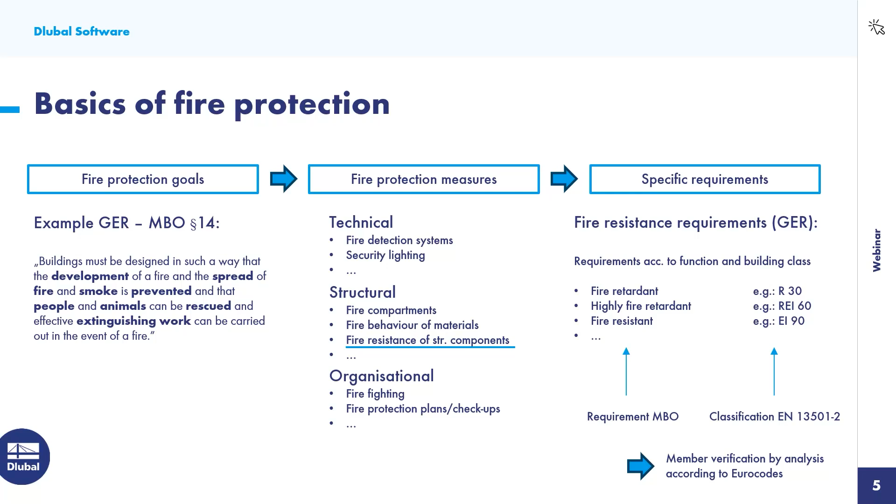So let's take a look at how fire design is regulated in the Eurocodes. I would like to start with the combinatorics. According to Eurocode 0 or EN 1990, the case of fire is to be regarded as an exceptional design situation. Accordingly, the mechanical actions are combined without partial safety factor.

The use of psi 2,1 is recommended in the main document for the leading variable action, but there are many deviations in national annexes. In Germany, for example, psi 1,1 is prescribed for leading wind actions. It is obvious that the combination rule results in significantly lower actions when compared with the permanent and transient design situation that we commonly use for the design under normal temperature.

As a safe side assumption, the loads from the cold design multiplied by a reduction coefficient can also be used. However, this is generally uneconomical and therefore not recommended, especially when we use a design software that can do the correct combinations anyway, like RFEM.

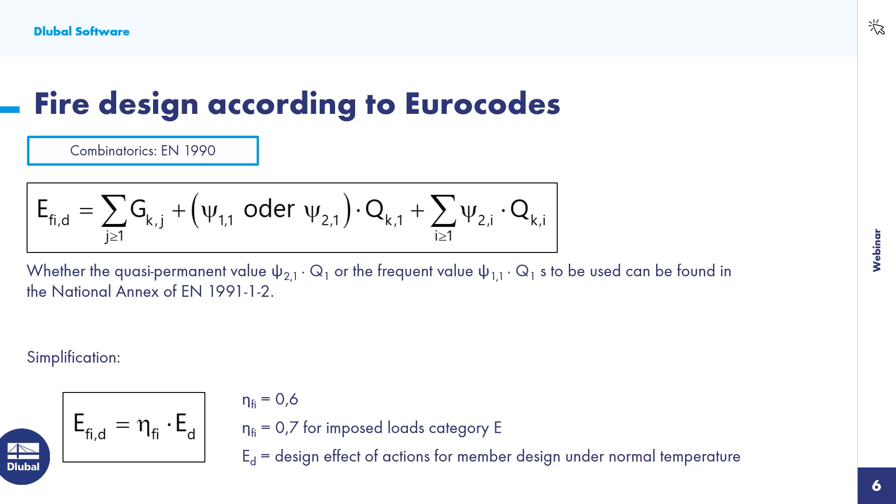In addition to the mechanical actions, the thermal action in accordance with EN 1991 Part 1-2 must also be taken into account. In the event of a fire, there's a considerable increase in the ambient temperature, and sooner or later, the structural elements exposed to the fire will heat up as well. This has a dramatic effect on the material properties of steel components on one hand. On the other hand, the temperature increase can lead to indirect stresses in case thermal expansion is restrained.

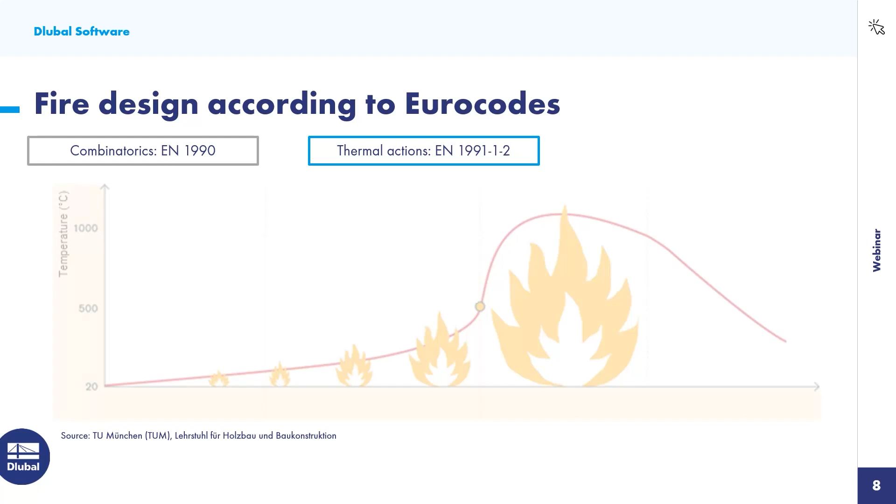Real fire scenarios develop in 4 stages. We have the incipient stage, the growth stage, the fully developed fire phase, and the decay phase. The transition to the full fire phase is called flashover and is associated with a rapid rise in temperature. For engineers, it is very challenging to accurately predict the development of a natural fire scenario. Instead of trying, so-called nominal fire curves have been established almost 100 years ago to describe the temperature developed in a compartment over the duration of the fire in a simplified manner.

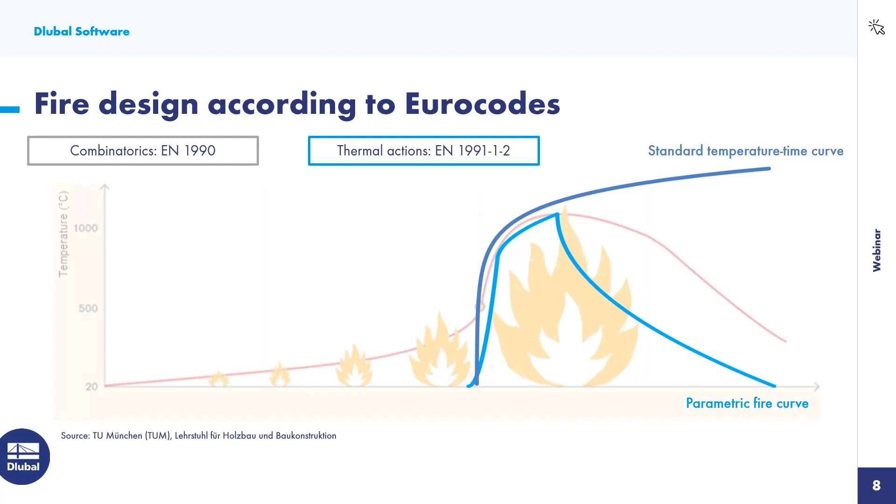The standard temperature curve is used for fires inside buildings. This temperature curve is also used for standardized fire tests on structural elements, which means that the behavior of typical elements under this nominal fire exposure is quite well documented and verified. Alternatively, the Eurocode also allows the use of more sophisticated approaches to predict the temperature development, such as parametric fire curves, zone models, or results from CFD analysis.

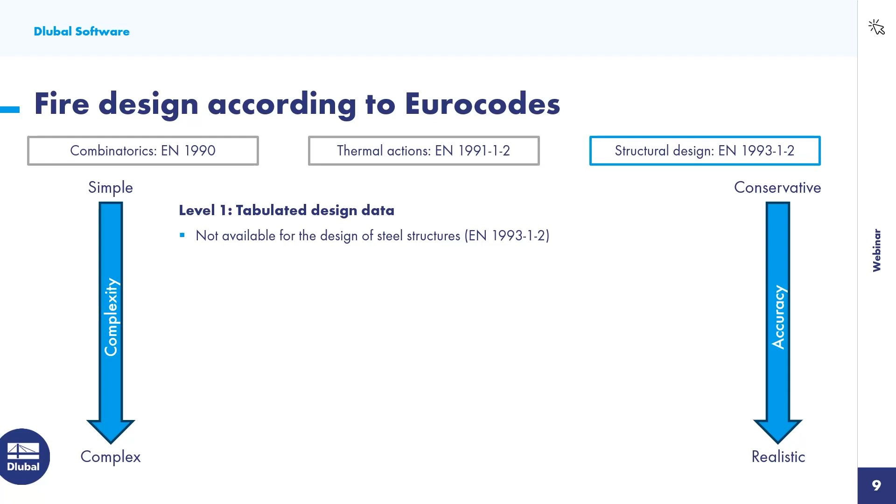The actual design of structural elements is regulated in the respective material-specific Eurocode, such as the Eurocode 3 Part 1-2 for steel construction. In principle, all ECs or Eurocodes distinguish between 3 alternative methods with increasing complexity and accuracy. The simplest design approach is design by tabulated data. This is oftentimes used for fire design of concrete elements, where it is sufficient to choose the suitable dimensions, for example, wall thickness, for a specific fire class. This approach is unfortunately not available for steel structures.

In the second level, we find the so-called simplified design methods. Here, the thermal actions are prescribed by nominal fire conditions, such as the standard temperature curve for fires inside of buildings. For such conditions, Eurocode 3 Part 1-2 gives clear rules for the design of steel members. This verification can either be done based on the resistance or based on the critical temperature.

The most accurate but also complex analyses are possible under the advanced design methods. The thermal actions are usually derived by more sophisticated methods here, such as parametric fire curves, zone models, or CFD. This enables a more economic design most of the times. The design rules are very openly formulated. Any suitable thermal and mechanical analysis model can be employed. However, the validity of the chosen approach must be proven on a case-specific basis and requires a high level of expertise.

In RFEM 6 and also RSTAB 9, the resistance-based simplified design method is implemented. A system calculation under elevated temperatures is not required in this case. The design concept is very similar to the design under normal temperatures, but under reduced load as we combine actions in the exceptional design situation. The thermal action is only taken into account on the resistance side and induces a reduction of design-relevant material properties. I would like to explain this point in more detail in the next slides.

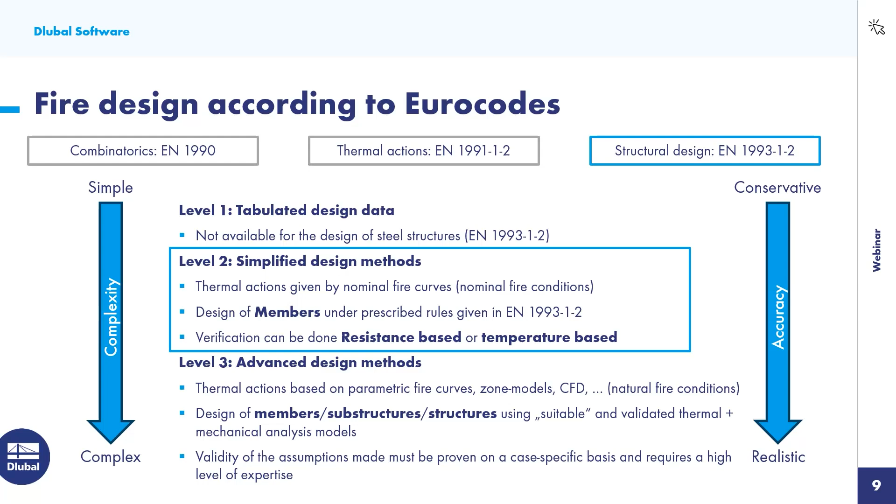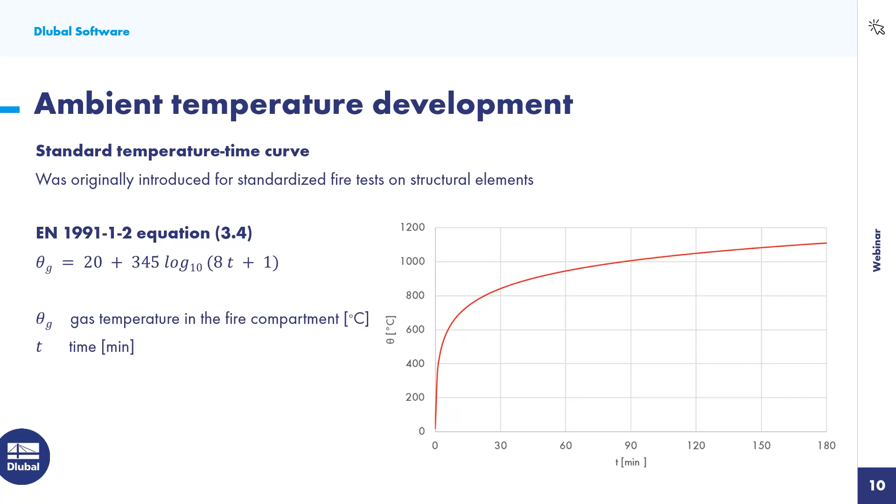As explained on the previous slide, the simplified design method is linked to the application of the standard temperature curve. This means the development of the ambient temperature during a fire is approximated in a simplified manner according to the logarithmic function shown here. The standard temperature curve idealizes the full fire phase and neglects the growth and decay phase of the fire.

So the development of the ambient temperature is specified by the standard temperature curve. However, for design purposes, we are interested in the actual temperature of the structural member. According to EN 1991 or Eurocode 1, Part 1-2, two different components must be taken into account when analyzing the transport of heat from the surrounding hot air into the heated component. The heat flux from convection, so the exchange of heat between the hot ambient air and the cold component surface in the boundary layer, and the heat flux from radiation or thermal radiation.

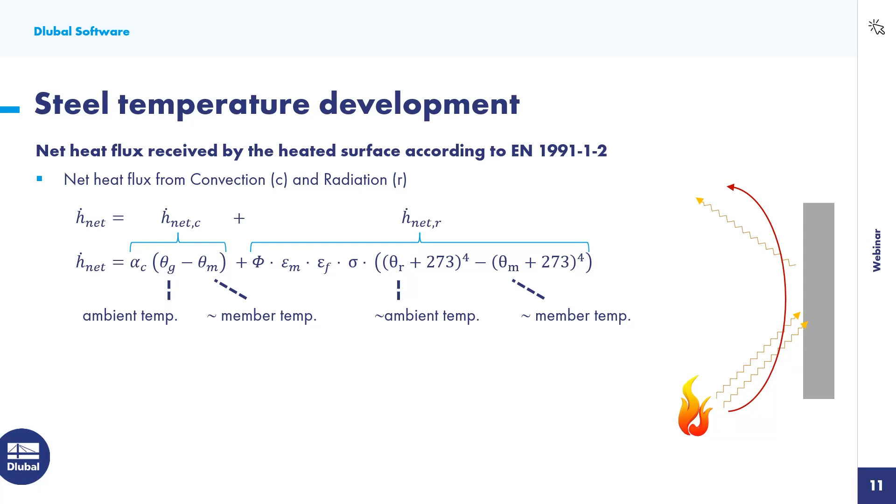I know there's a lot to explain, but I would like to leave the formula as it is right now. We will come back to the various parameters in detail later, as they are important influencing variables for fire design and any fire protection measures. For now, we take note that we can describe the relationship between ambient temperature and component temperature in the event of a fire. But how does the member temperature actually affect the design?

According to Eurocode 3 Part 1.2, design-relevant material parameters such as the yield strength and stiffness must be reduced depending on the material temperature. The yield stress only has to be reduced at temperatures above 400 degrees Celsius, but then quite rapidly, as you can see here. The stiffness already decreases at significantly lower component temperatures. At a temperature of around 600 degrees Celsius, the reduction of the yield stress already accounts for roughly 50%. At 800 degrees Celsius, it is almost 90%, so there's only very limited resistance left.

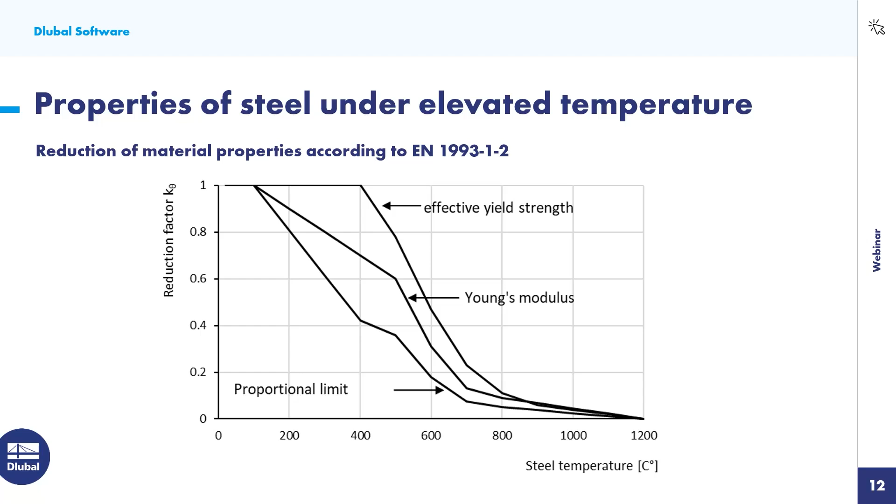Okay, so I have already prepared this simple model beforehand. It's just a simple beam with an intermediate support in lateral direction in the middle. It's an HEA 300 section and 10 meters long. I think the steel is S235. Yes. This member is already loaded by 3 load cases: self weight of the beam itself, then dead load, an additional 5 kilonewton per meter, and load case 3 is imposed load category B with 7.5 kilonewton per meter.

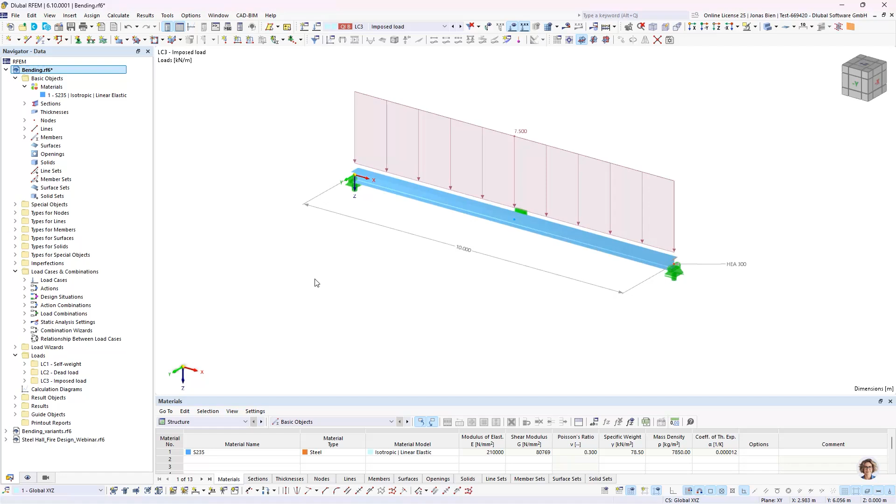I've also defined one design situation for the code design of this member. So the usual combination, permanent and transient, as you can see here, and this results then in automatically generated load combinations. I want to start with the code design.

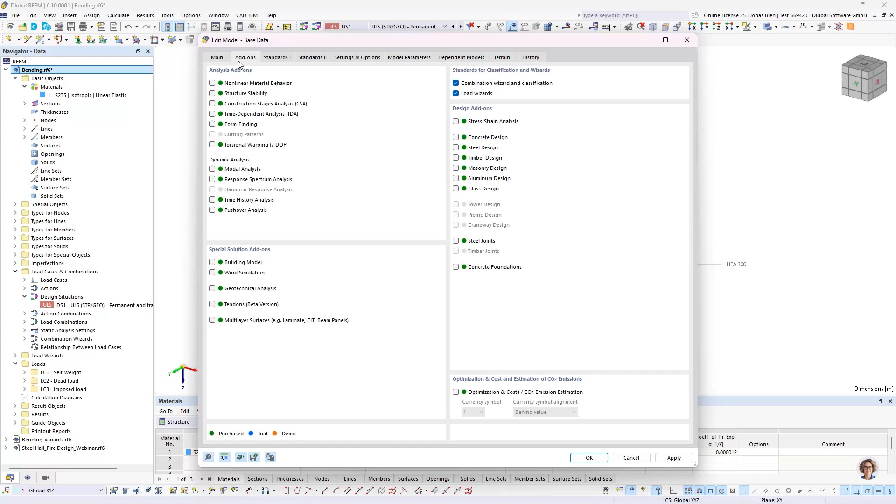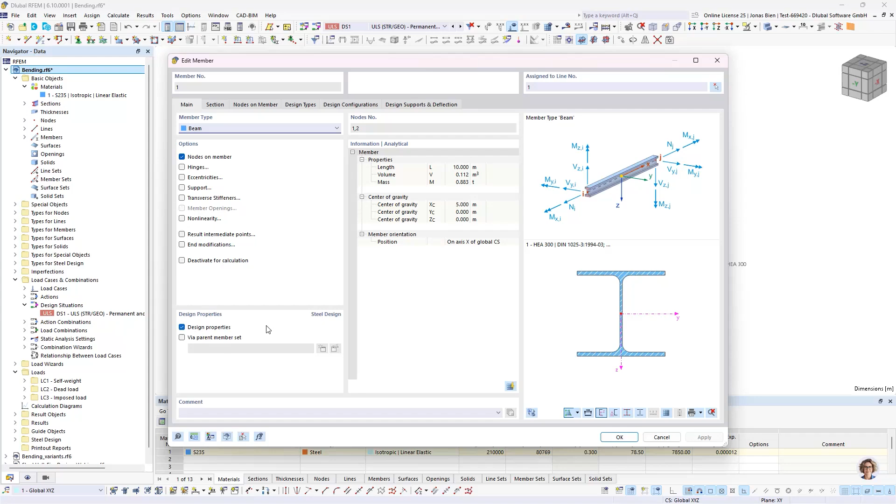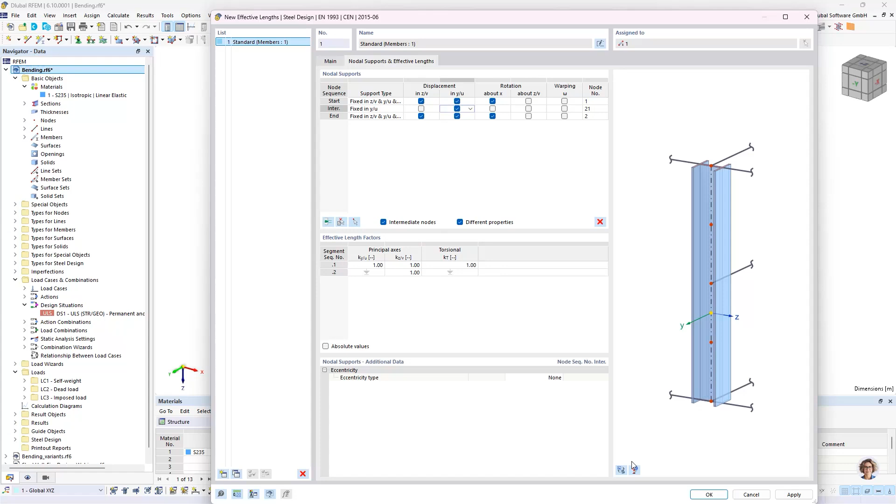So I switch on the Steel Design add-on, go to standards, and for now I will just use the main documents of the Eurocodes and use the common rules. Okay, and as we are used to, the design add-on has already recognized that we have this member that can be designed with our Steel Design add-on. So that's fine. And besides the section checks, I also want to do the check for lateral torsional buckling according to the equivalent member method. So I will also define an effective length, and I want to leverage the intermediate node. So I will just assign a lateral support here at the middle, as we have modeled it in the global model as well.

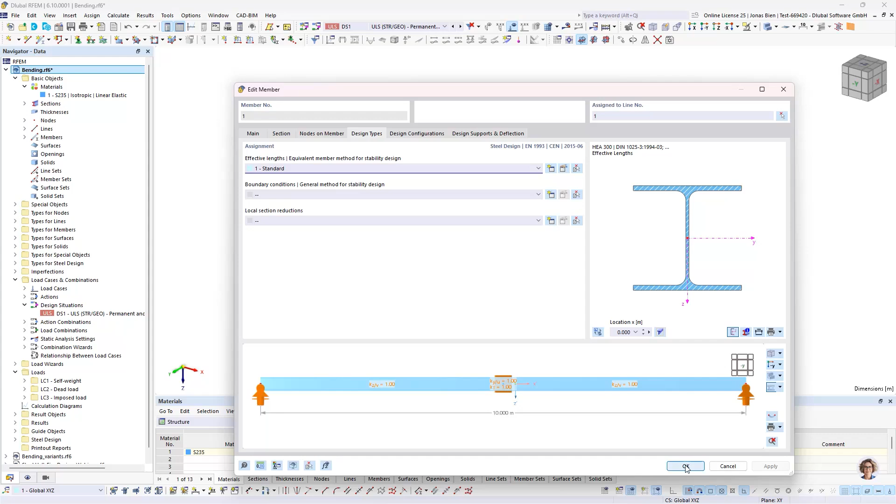Okay, so let's do this. And by the way, this assignment of the buckling length is valid for the code design and also for the later fire design that we are doing. Okay, but for now, let's start with a code design, the usual thing that we know. I will just run the simulation now, this very simple case,

and we will check the utilizations that we get under normal temperature. Okay, so as we are used to, we get section checks for shear and bending. There's also, I think, shear buckling. And since we also activated the buckling length, we also get the stability check for lateral torsional buckling. We can see that the maximum utilization is around 83%. So this is completely fine. Everything's good so far. So now let's see how this changes when we investigate the fire scenario.

So let us do all the adjustments that we need to take in order to activate this. First of all, we need a design situation that is appropriate for our fire case. So I will add a second design situation for the accidental load case using psi-2-1 as it is prescribed in the main documents of the Eurocode. We can again check the combination rule, and this is totally fine for us and looks like the rule that I showed you before in the slides. Okay, so I get two additional load combinations now for the fire situation.

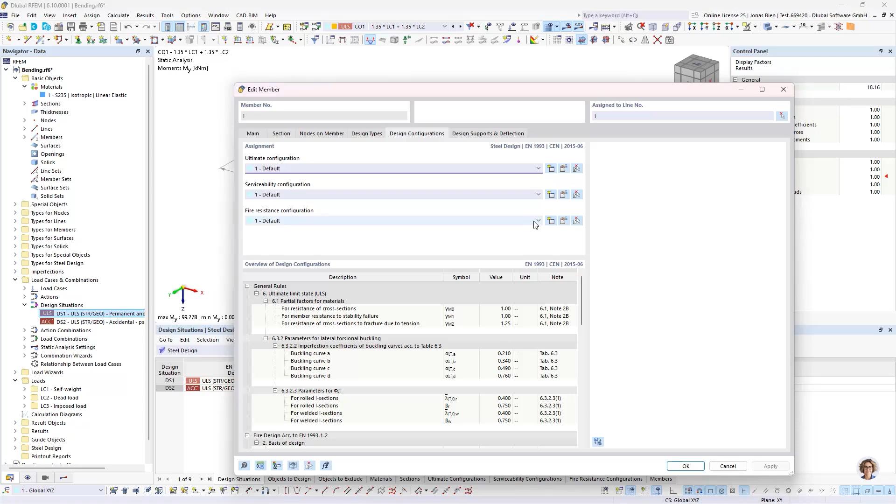And in here, we have to, first of all, define what the resistance class of my member is going to be, so at what time I want to perform my fire design checks. In this case, I would assume that my member needs to survive for 30 minutes, or has an R30 requirement. So I will set 30 minutes as the required time for the fire resistance.

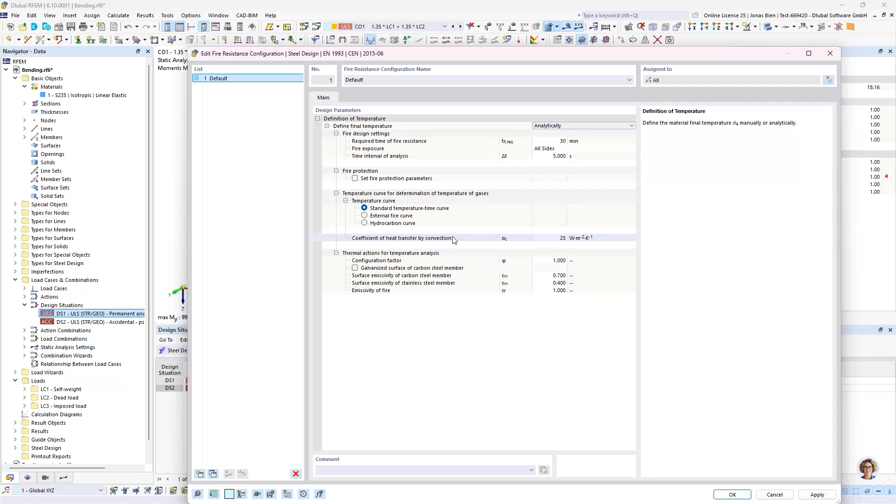We can also see that under the temperature curve for determination, we have by default set the standard temperature time curve, and this is the one that we want to use for internal fires, and the member design method here. We could also give a manual temperature that the program then takes to perform the fire design checks, but we want to have the temperature of the steel defined by the standard temperature time curve here. And we want to do the check after 30 minutes. The remaining parameters I will not touch yet. We will come back to this later. So I will just assign this by clicking OK, and then I will run the steel design again.

So we have to solve now the two additional load combinations, and then the steel design runs again. And first of all, I want to compare the forces that we now have to take for the design. So if we check the maximum bending moments for the design situation 1, so for the cold design case, we have a maximum bending moment of almost 240 kilonewton meter, while in the second design situation under accidental combination, we get more or less 100 kilonewton meters.

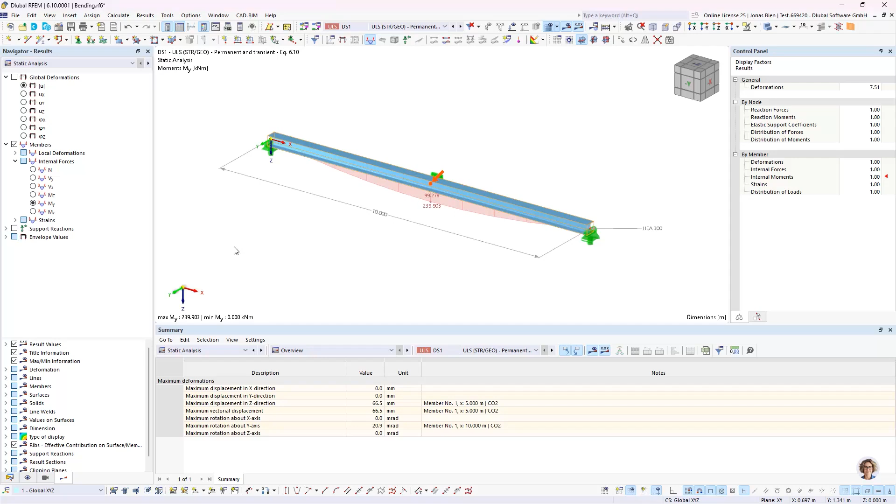So the load that we need to take into consideration in the hot design is much smaller than in the cold design. However, as we could already see, we now have a big problem with our design verification checks. As we can already see here, the maximum utilization is over 300%. So that's not good at all. So let's check why that is, and how come the utilization is so much higher than in the cold design stage. So let's actually compare some design checks.

We could start with the bending check here about the strong axis. We will start with the cold design. So we are very used to this. We have the 240 kilonewton meter design bending moment. We do the section classification. We see we have a class 1 section. That means we can use the plastic design resistance here to calculate our utilization. And in this case, we have a utilization under 80%. But how does this change in the fire design situation?

So let's check the respective check under increased temperature. We see we have a smaller design bending moment as already shown before. And now we also have a different section class. That is interesting. And we can also check what is the reason for this. This is one part where the fire design differs from the cold design: the material coefficient that we use for the cross-section classification is multiplied by 0.85. So generally all the limits for the cross-section classification are decreased to 85%. And in this case, this leads to a different cross-section classification. We just have to be aware of this.

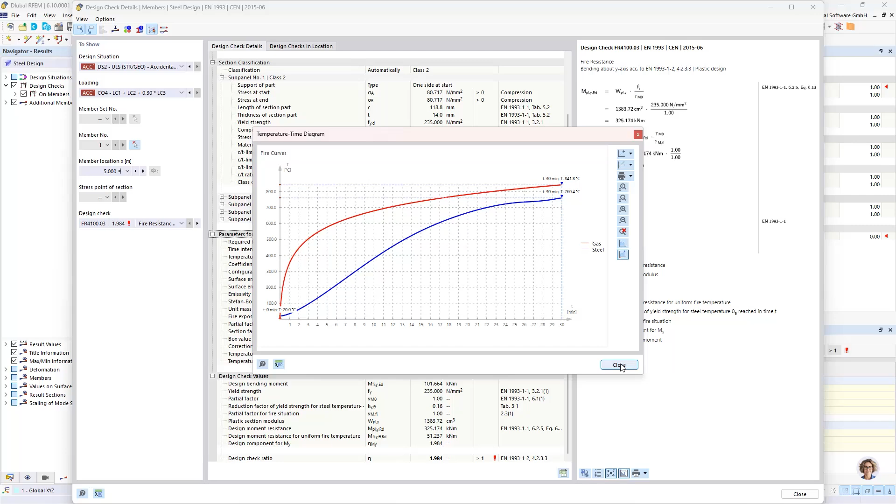We can also check how the development of these temperatures is over time. So here we get a nice temperature-time diagram showing the standard temperature curve here in red and the temperature of our steel member according to the formulas that I've shown you in the PowerPoint slides. There are also some other parameters here given for fire resistance. Up here we find all the settings that we have assigned to this member by the fire design configuration. And then we have some additional parameters here that I will focus on later. But for now, we can see, for the cross-section checks, we have a drastic reduction of the resistance due to the increased temperature, which is very high in this case.

Maybe we can also check the stability design check, because that also reveals some details to us. So first of all, we calculate the critical bending moment the same way as we do it for the cold design. So I think this 757 should be the same for the cold case as well. When we check the stability design check, yes, it is 1-to-1.

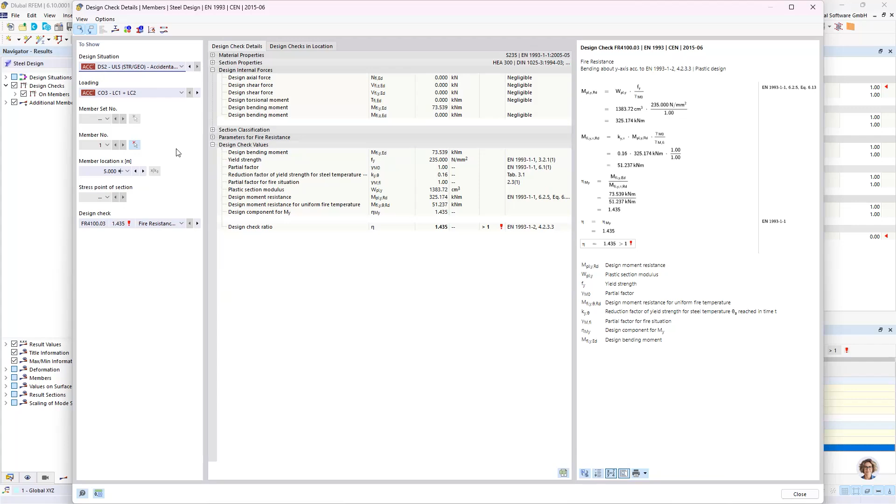But then in the fire situation, we have to again reduce it by taking into account a modified dimensionless slenderness. And in this case, this dimensionless slenderness is not only modified by the reduction factor for the yield stress, but also depends on the reduction factor of the stiffness. Because of course, stability design checks are also very much dependent on the stiffness of the system. So any degradation on that side will also alter our verification check for instability. Another important point is the derivation of our imperfection factor. While in the cold case, this is dependent on the cross-section buckling curve, here it is only dependent on the material of the section. So there are slight adjustments, but otherwise the schema for the verification checks is very similar to the cold design case.

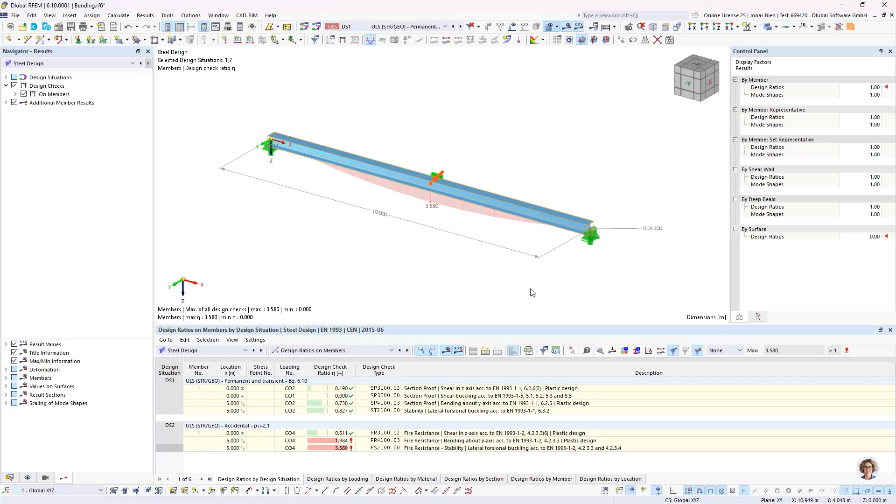I think we can agree that our first attempt to verify the fire resistance of this beam was not very successful. So, what can we do to increase the fire resistance of our beam? Of course, we could lower the loads or increase the section size, but we have seen that the member heats up very quickly and we have only minimal strength and stiffness after 30 minutes. To discuss possible measures we can take to delay the heating process, I would like to come back to our formulas that describe the heat transfer from the ambient temperature into the structural element.

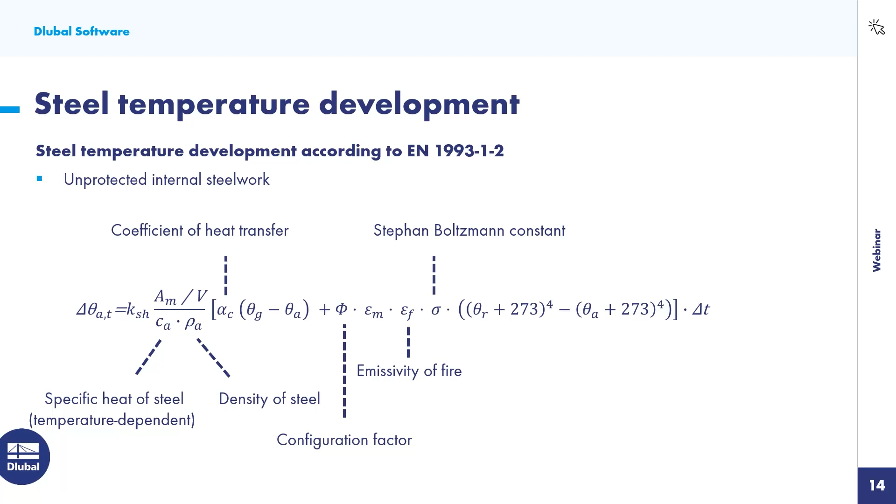So we've seen these before, and if we combine the two formulas, we get this quite long expression here. Most of the parameters represent physical constants that we as structural engineers cannot influence as much as we'd like to. There would be the specific heat of steel, the density of steel, the coefficient of heat transfer, the configuration factor, the emissivity of fire, and the Stefan-Boltzmann constant. Those we shouldn't touch at all. However, let's take a closer look at the expression A_m/V. This ratio is also known as the profile factor and describes the ratio of the cross-section surface area to the volume per unit length, or in other words, the profile circumference to the profile area in the section.

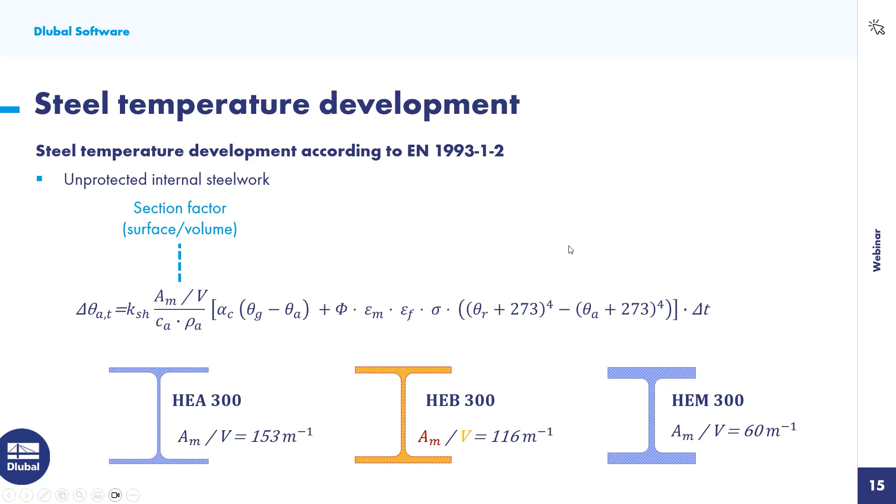So the profile circumference for the HEB 300 here would be the dashed red line, and the cross-section area or profile area would be the yellow section. If we now compare the three cross-sections shown here, so the HEA, a bit more slender than the HEB, and then the more compact section, HEM 300, we can see that the circumference of the profile hardly changes as the cross-section parts become thicker, while the cross-section area increases significantly. This means that more compact cross-sections have a lower profile factor, as demonstrated here in this example calculation, and as a consequence, since the profile factor is in the numerator of this heating equation, compact sections heat up more slowly. And we will check this in a minute in the model again.

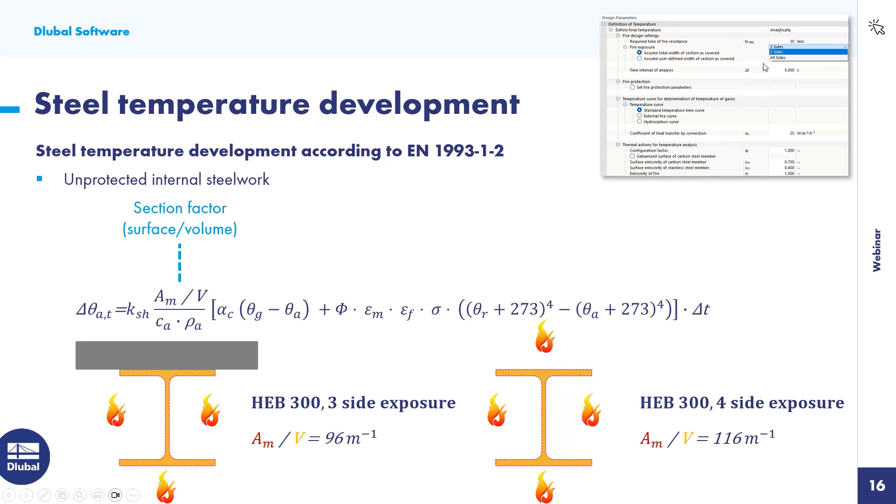But there are also other ways to reduce the profile factor. For example, if one side of my cross-section is protected from direct fire exposure, as shown here in the lower left figure, I can reduce the circumference by one flange width. So this could be relevant if we place a column next to a concrete wall or put a concrete slab above a steel girder without leveraging composite action. So such a situation can also be considered in our program through the fire configuration settings. I will also show this later.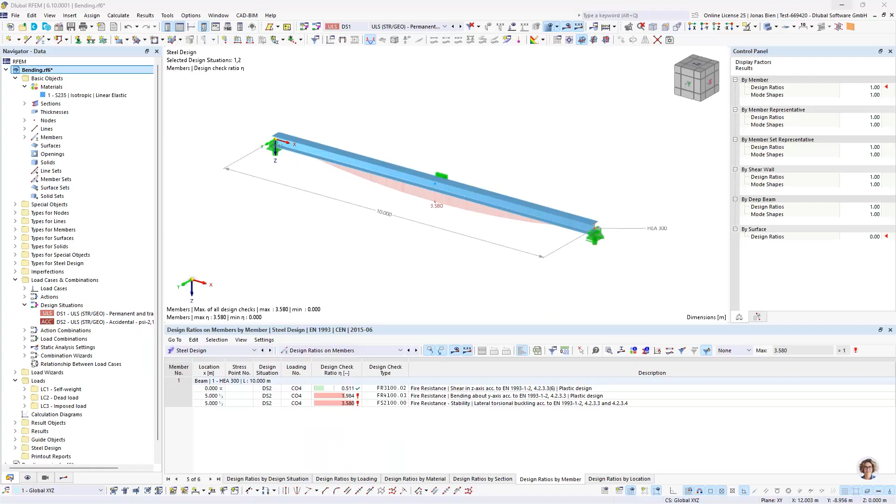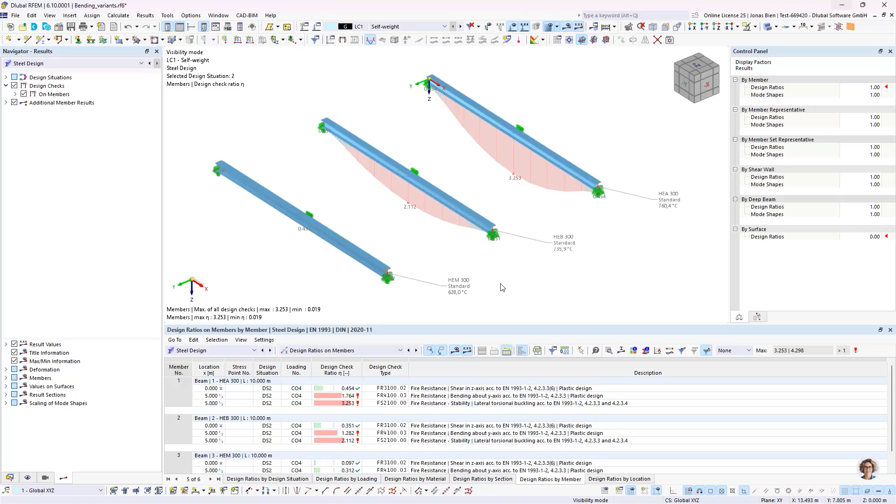So let us switch to RFEM again, and I have also prepared a second model where I basically just copied my simple beam HEA 300 that we discussed before and changed the section into an HEB 300 and HEM, as I've also shown you as an example on the slides. I applied the same loads and so on, and conducted the fire design checks here. And it's of course no miracle that the utilization factor for the bigger profile HEM 300 is lower. This is expected when we choose a more capable section. HEM has a higher bending resistance and also much lower slenderness, which comes into play when we look into the lateral torsional buckling design check.

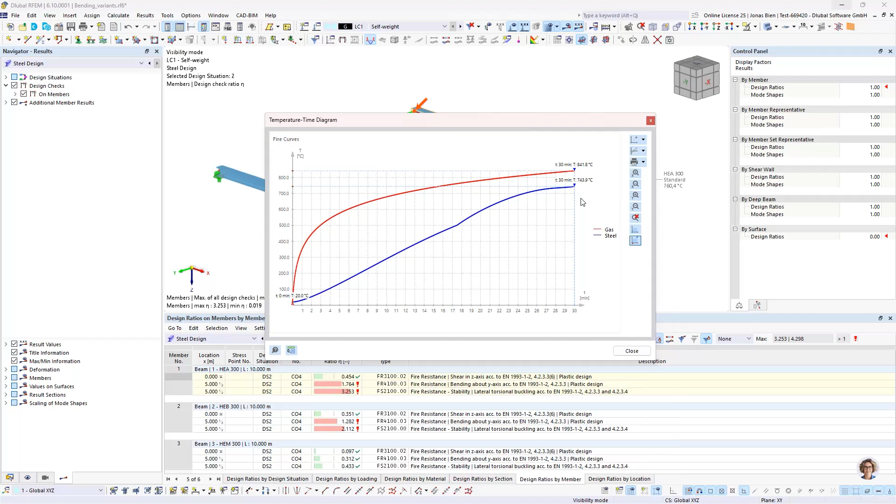But we don't want to focus on that, but on the member temperature and how it develops during the fire event. So we have already checked the temperature development for our HEA 300, and we've seen that at the end, at 30 minutes, we have 743.9 degrees Celsius. The HEB 300 is only a bit colder. It's 735.9, but when comparing this to the HEM, we see that by taking this much more compact section, we get a lot less heating after 30 minutes. So the HEM only has a temperature of 628 degrees Celsius after 30 minutes, although unprotected.

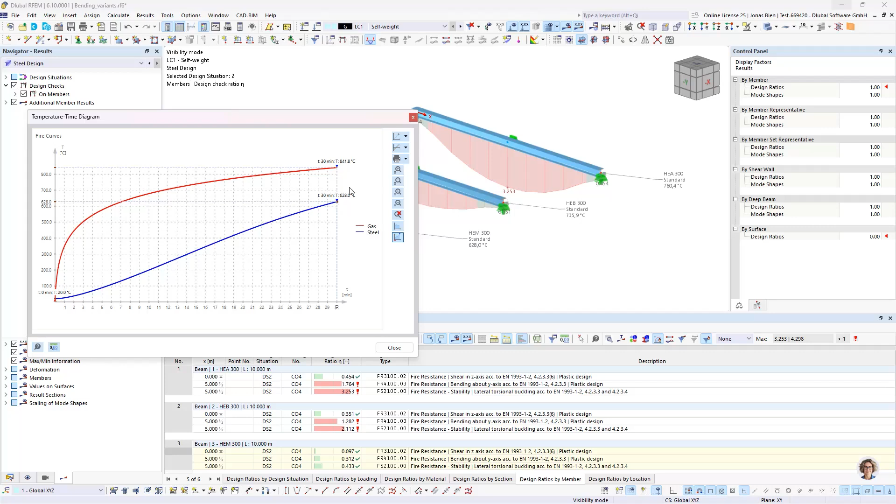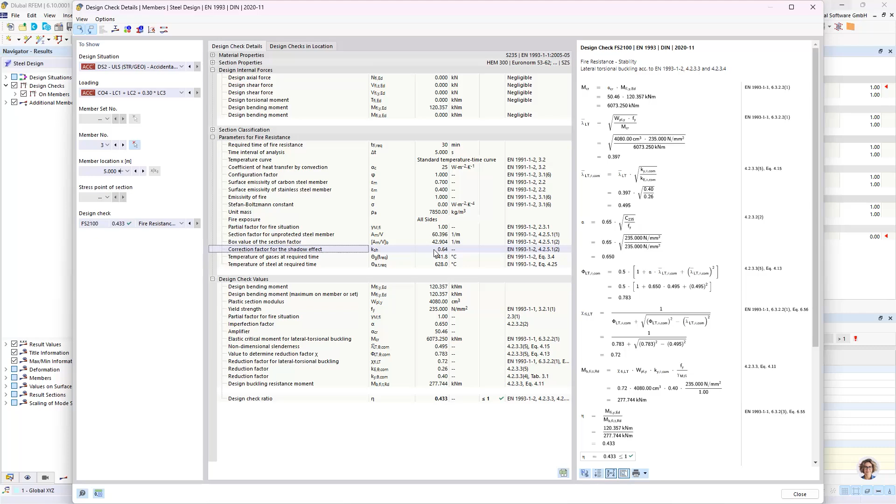We said this is because of the profile factor, and we can check this profile or section factor here in the design details for all these members, and we can see that as we move on to member number 3, which is the HEM, we have a very low section factor, resulting in lower temperatures. We also see the correction factor for the shadow effect that we talked about, also given in the design details.

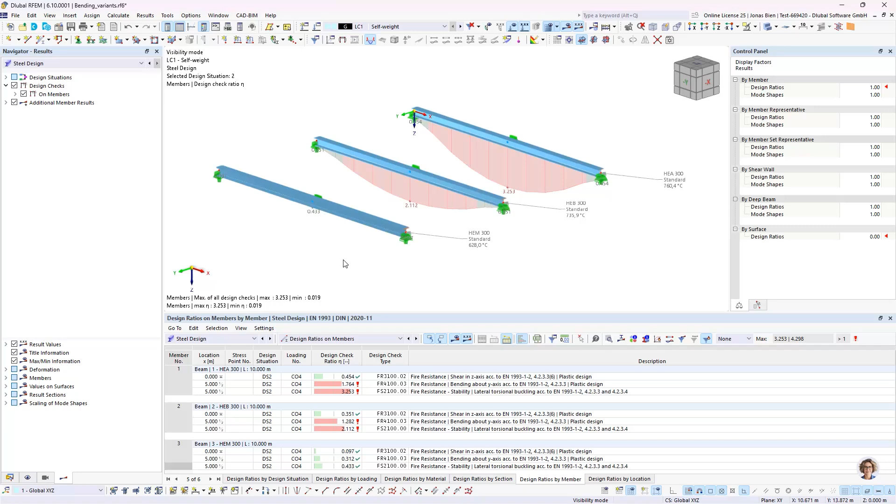Okay, so we also talked about a second option to reduce or manipulate the profile or the section factor, and this would be by avoiding side exposure to the flames, for example, by a concrete slab. And I have also added another example where I modeled an HEB 300 and I modified the fire resistance configuration in that way that I only apply a 3-sided fire exposure. And as a result, we can see that compared to the standard fire case with 4-side exposure, it heats up around 30 degrees Celsius less after 30 minutes, which isn't a huge deal, but it's something.

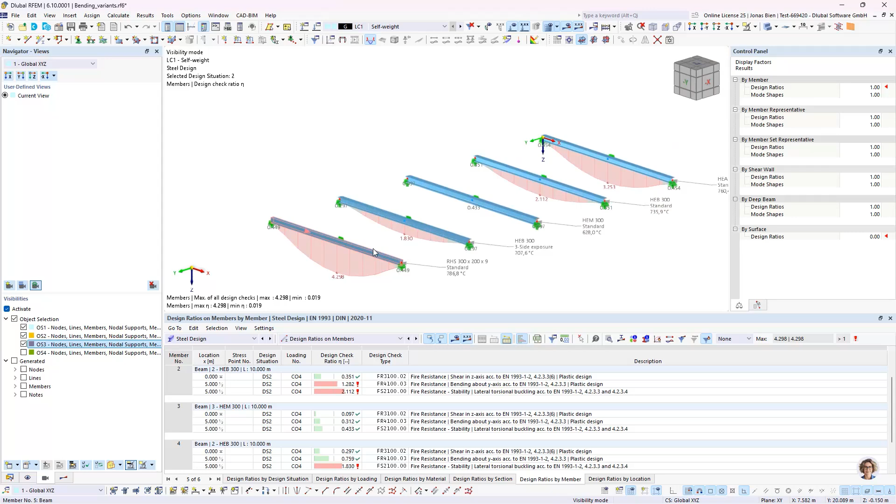And then last but not least, I wanted to show the influence of this correction factor for the shadowing effect. So I also incorporated a hollow section here, an RHS profile, which has a similar section factor as the HEB 300, but it doesn't profit from the shadowing effect. So let's go to the design details, where we can also check the k_sh factor, and in this case this factor would be 1.0. So we couldn't leverage any of this here, and accordingly it would heat up a bit more even.

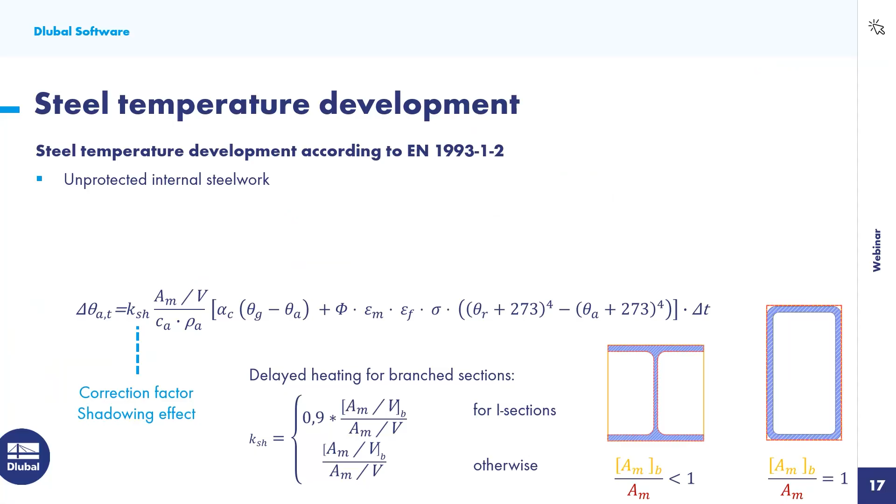Okay, that's about the section choice and how the section choice modifies or impedes the heating process of the member during the event of a fire. But there is actually another factor that we can manipulate and alter to adjust the heating process. So let's go back to the PowerPoint, to the next slide.

I would now like to discuss this factor here, epsilon m, which describes the surface emissivity of the member, not of the flame, but of the member. And this factor describes how large the proportion of absorbed radiation energy is. An ideal black body has an emissivity of 1 and absorbs all incoming radiation in theory. An ideal white body has an emissivity of 0 and reflects all radiation. Real surfaces have values between 0 and 1.

Although this sounds highly theoretical, we are all very familiar with the relationship between surface emissivity and temperature development from real-life experience. Imagine on a sunny summer day, it is much nicer to wear a light-colored shirt than a dark one, as it reflects a greater proportion of solar radiation and does not heat up as much. That sounds good, but you might ask, what does that have to do with our steel member? And here we actually have the possibility to change the surface properties by galvanizing it.

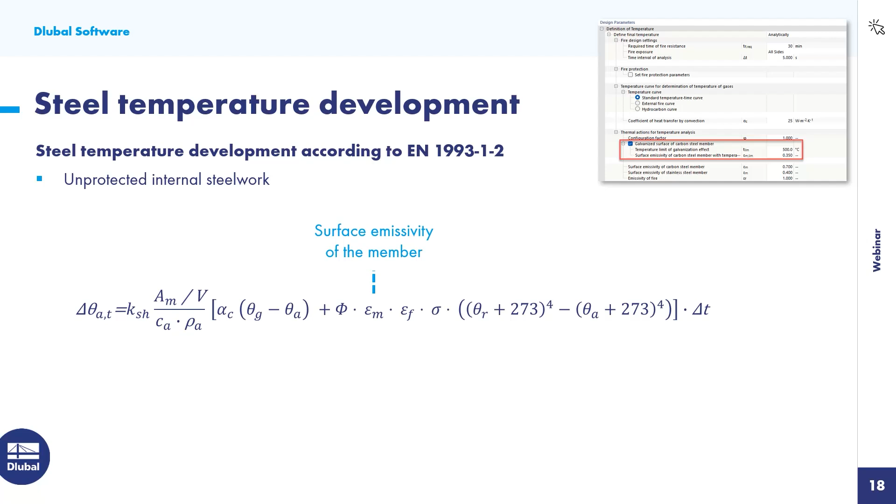As part of a research project at the Technical University of Munich, it was discovered that galvanized steel has a significantly lower emissivity than non-galvanized steel. We can leverage this effect at least up to a member temperature of 500 degrees Celsius, and only for shiny zinc coatings that we get for hot dipped galvanizing category A and B steels.

If I am correctly informed, this additional regulation has already been included in the draft of the second generation Eurocode. In Germany, this option has already made it into the majority of state building regulations via an additional guideline published by the Institute for Hot Dipped Galvanization, named the DASt Guideline 027. So we can also take this galvanization into account in our program. I can show it to you. I think it's simpler if I show it to you just in the program. So let's just jump back.

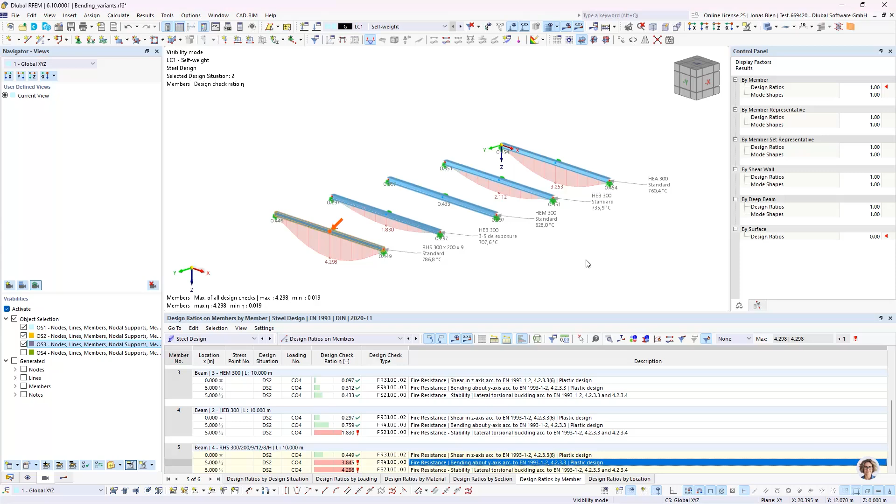Now I want to modify the selection of the members that I have modeled up front. I again have copied all of those members that I've shown you before, different sections, and also the HEB with the three-sided exposure, and modified the fire design configuration in such a way that I also changed the emissivity by galvanizing the surface of the carbon steel. I can do that by just activating this option here, and then it also takes into account this limiting temperature of 500 degrees Celsius, and until then uses a lower surface emissivity.

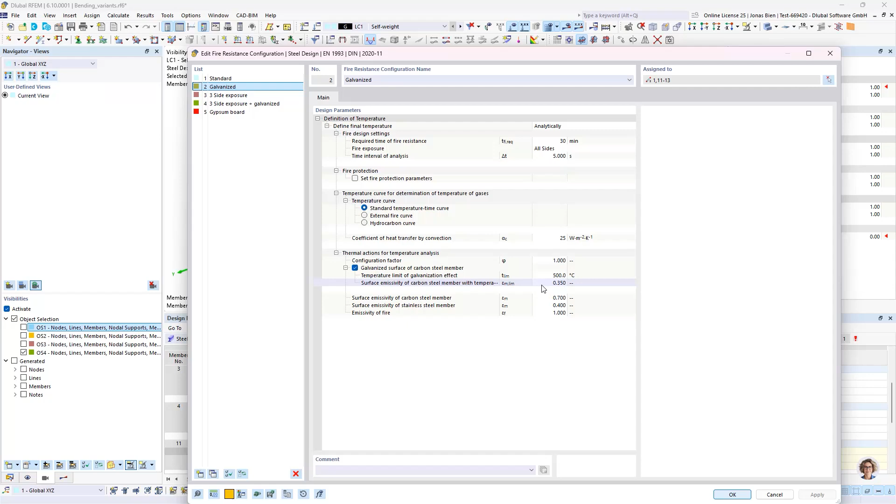Okay, so let's see how this again affects the heating up of the member. We can see for HEA it does not have such a huge effect. Same goes for the HEB300. Let's actually look into one of those diagrams because it reveals one important fact, that the emissivity changes at a temperature of 500 degrees. As we can see here, there's a significant dent in this curve, and this is at a temperature of 500 degrees Celsius and marks the point where the emissivity jumps from 0.35 to 0.7.

For the HEM profile, the influence of the galvanization is very, very huge. Instead of a temperature of 628 degrees Celsius, we get a temperature that is almost 150 degrees lower after 30 minutes. And that's mostly because for the whole 30 minutes, we are below a member temperature of 500 degrees Celsius, which means that until the end, we can leverage the lower emissivity of the member surface. And then, of course, the benefit is much greater because it's more or less the integral of the heating over the time.

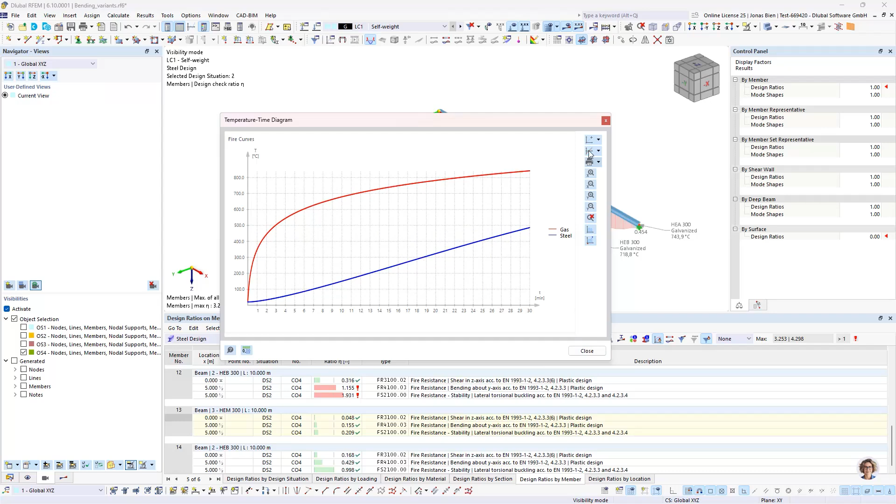But it is also interesting that, for example, when we consider an HEB300 and maybe anyway have one side of the section covered by, for example, a concrete wall or something, and we then take into account additionally the galvanization that we might anyway have because of corrosion protection measures, we see that we can reduce the member temperature from 736 degrees to 633, and we see that under this temperature we are even able to fulfill the verification checks, and instead of a maximum utilization of 200 something percent, we go under 100. So without any additional measures in this case, we could already fulfill our fire verification checks.

All right, last but not least, let us talk about conventional fire protection systems. Therefore, I would like to switch back to the PowerPoint presentation.

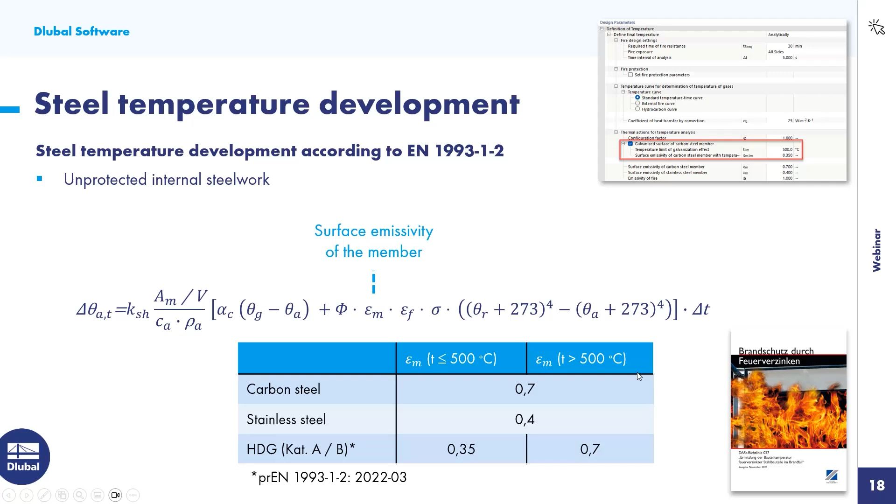So, as said earlier, the possibility to improve the fire resistance by galvanization is very interesting, as many steel structures are galvanized anyway for corrosion protection. In this case, the improved fire protection is a nice bonus. But conventional fire protection systems exist as well. They have a much higher protective value, and they can also be taken into account in our program.

We can take into consideration spray, plaster, or board encasement, and such systems can be taken into account by using an alternative formula provided by Eurocode 3 Part 1.2 for the temperature development in internal steelwork that is insulated by fire protection material. In addition to some of the parameters that we have already introduced earlier, the properties of the fire protection system are also taken into account. So we have the thermal conductivity, the thickness, the specific heat and the density of the fire protection system.

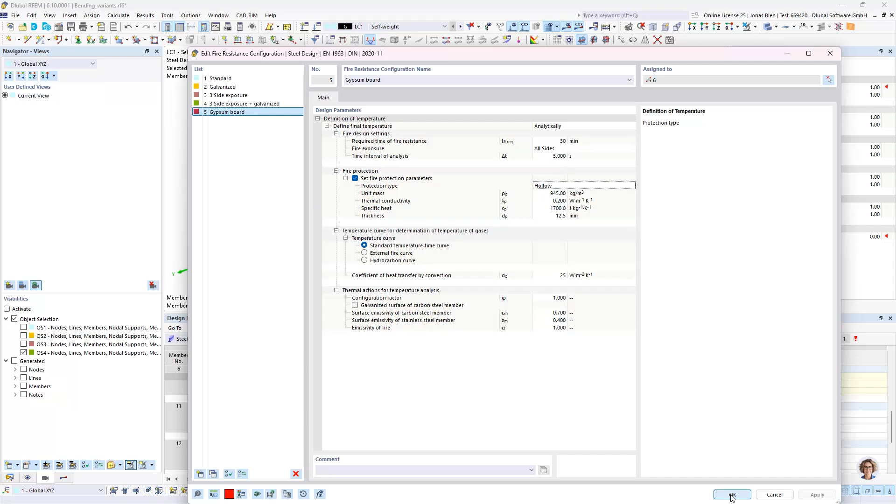And what I can see is that this has a dramatic effect on the temperature. In this case, by the encasement, I get a very low temperature after 30 minutes, below 300 degrees Celsius. So higher fire resistance classes of R60 or R90 can also easily be realized with such sophisticated fire protection systems.

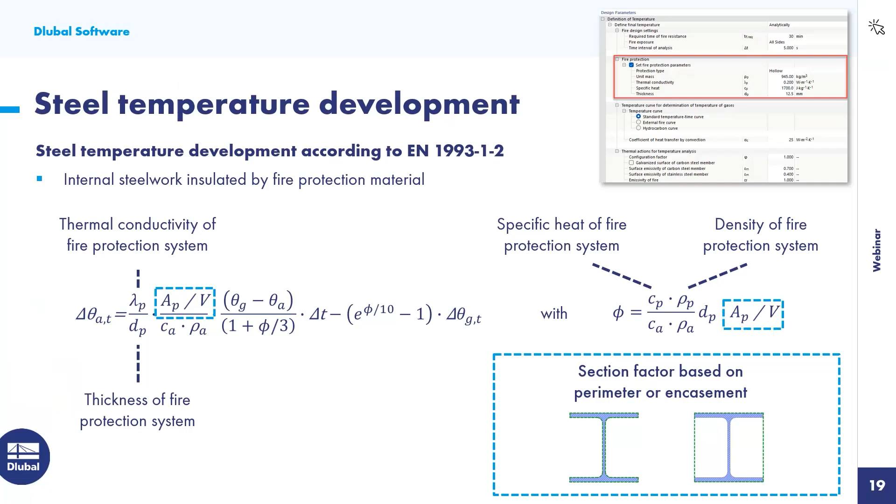Okay, we have now dealt extensively with the fire design assessment of a single member and checked how we can influence the temperature development in that member in the event of a fire. I would now like to move on to the more advanced topics and questions.

And because the formulas that we use to determine the heating of our section always assume a constant heating over the section, we don't need to take into account the thermal deformations at all. However, there could be cases where you could be interested in determining indirect actions due to higher temperatures that must not always be under fire conditions, like if you have a compartment of a building that is heating up due to some chemical processing or because there's a heater in the room. So I want to demonstrate how you could theoretically consider such an indirect action analysis in our software as well. Although I want to be clear again, in my opinion, you don't need to take this into consideration in the fire design check when following these rules that we discussed today.

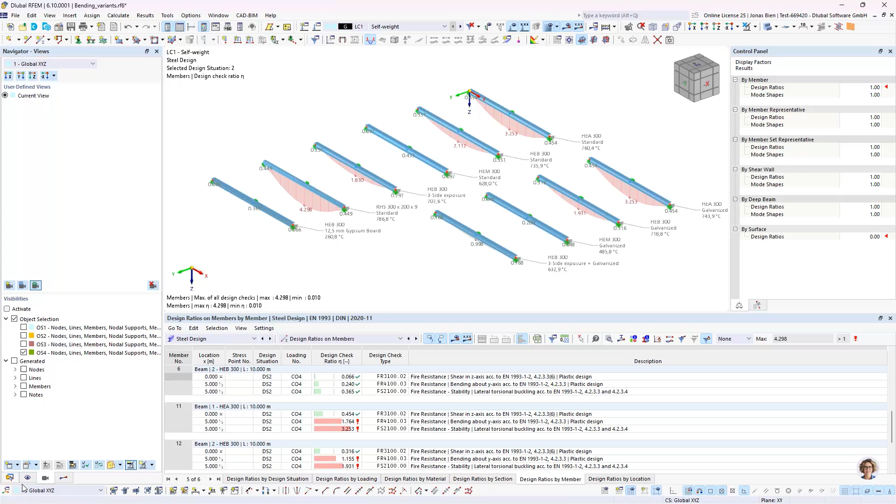Okay, let's go back to the program and go into the third model I have prepared, which is basically the steel hall that you have seen on the slide before. In order to calculate these indirect actions, we first need a temperature that we want to apply

to the model. And this temperature we could either derive by the standard temperature curve, or we could derive it by some other specification or a parametric fire curve, CFD analysis, whatever it is coming from. We need to make some assumption about to what degree our structure heats up. And then we can apply this temperature load via, for example, a member load.

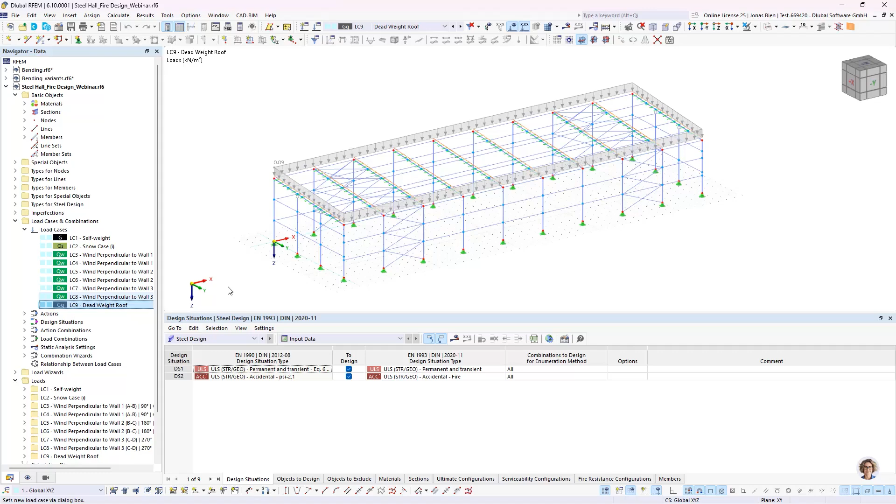So I want to go ahead and create a new load case for this temperature load. And in this load case, I think it's sufficient to do it here. We want to analyze the effect of the thermal expansion. So I create a load case 10. Let's name it temperature.

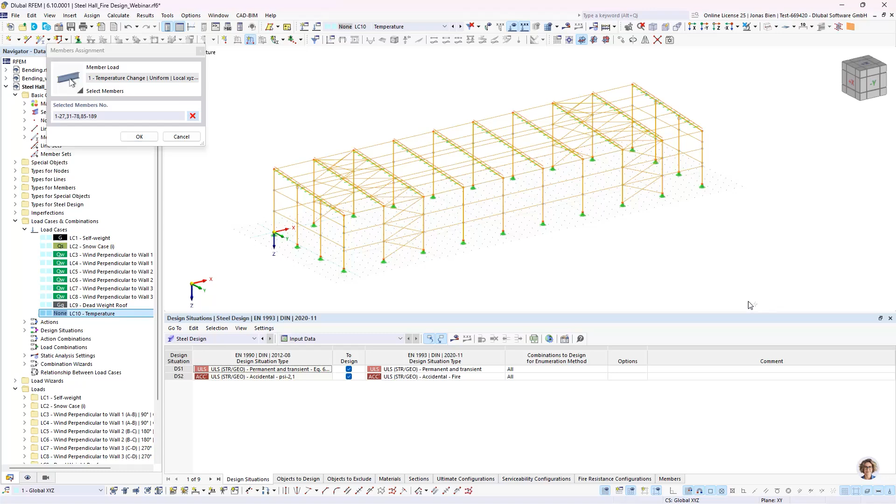And in this load case, I want to apply, let's say we aim for a 30-minute fire under a standard temperature curve that would give us an ambient temperature of around 800 degrees Celsius. I have many sections here. Of course, they would all heat up differently, but I will now just, on the safe side and for demonstration purposes, apply a uniform temperature change to all members of 800 degrees. So that's just some assumption. Okay, so I select all members and apply a constant temperature over the section, temperature increase.

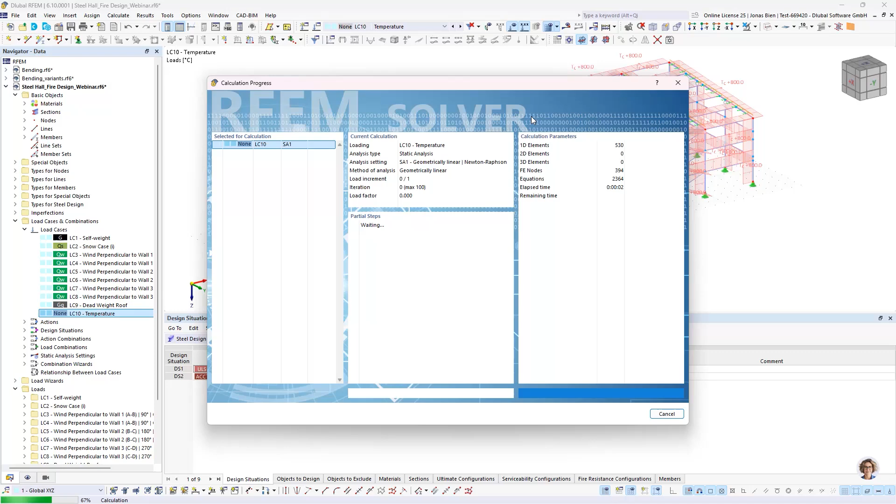And now I could just run this analysis here, calculate the resulting reactions under this temperature increase. And I would be actually shocked because, as you can see here, we get very large restraining forces. So as I already mentioned, the steel wants to expand, and we have in this steel hall bracings in some of these bays, and the compression members between those braced bays cannot expand very much. So the thermal deformation actually goes into axial force, and we get a very huge compressive action here in these members.

But now we have to consider one thing. Eurocode 3 part 1.2 says that we have to also modify our mechanical properties of the steel at elevated temperatures, and we can take this effect into consideration as well, because when we remember the diagrams we looked at regarding the properties under elevated temperatures, we may remember that we do not only decrease the strength of the material with increasing temperature, but also the stiffness. And the lower the stiffness, the lower these restraining indirect actions will actually be.

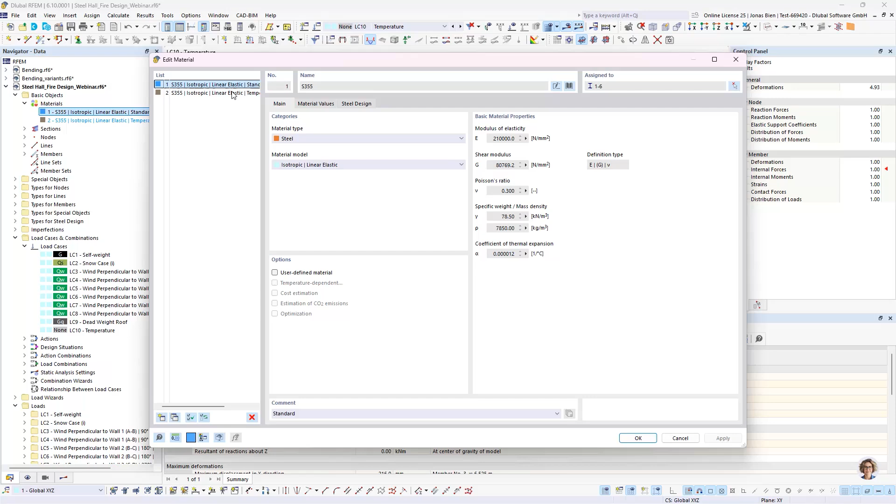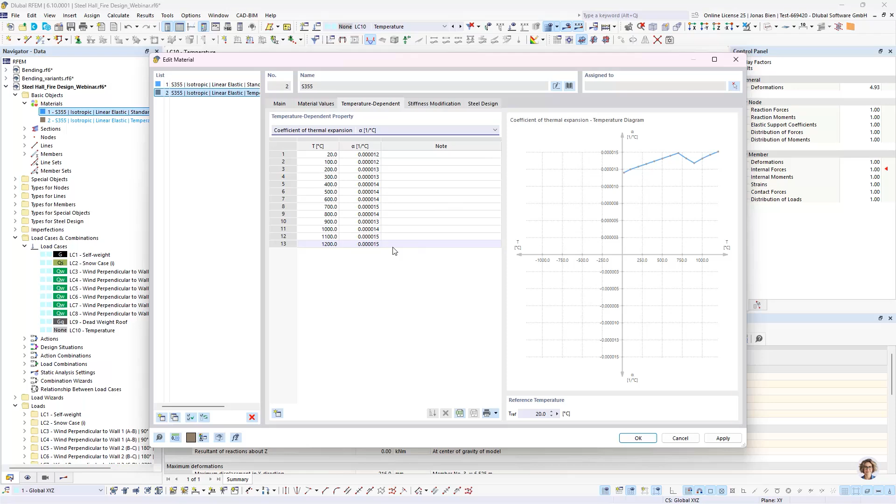So I have already prepared two materials. The first one that we just used for the first calculation step was just a regular mild steel S355. And the second one is a copy of that, but here I activated the user-defined material option and the temperature-dependent option. And by doing so, I am then allowed to enter a temperature-dependent modulus of elasticity, for example, and this curve is now just copied from Eurocode, basically. All these points are given in the Eurocode document, and we can leverage this to enter our temperature-dependent material properties. Also, I think the coefficient of thermal expansion is dependent on the temperature, and I can take this into account

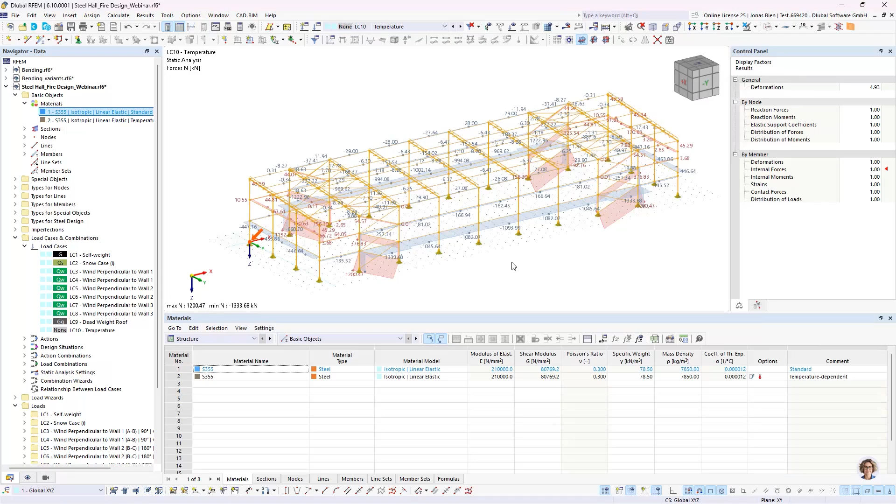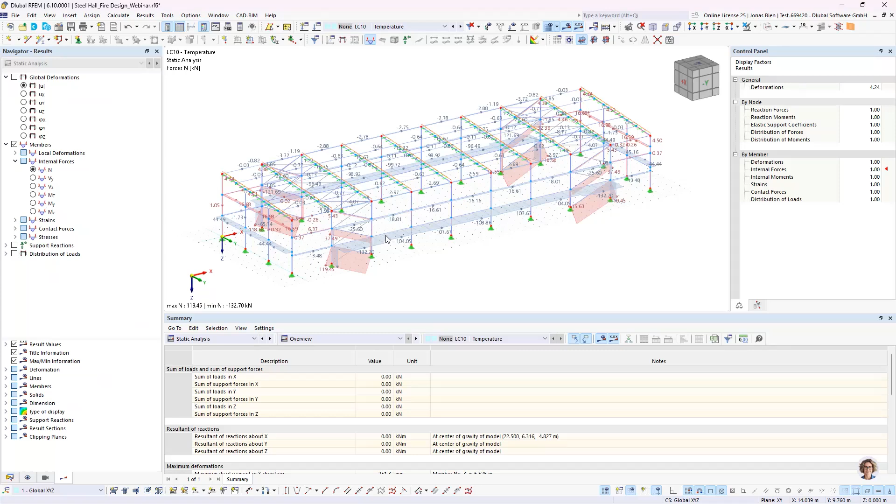as well here. Now let's see what happens if we actually take this material into account, the temperature-dependent one, and how this affects the results, the indirect actions that are generated under elevated temperatures. So we remember we had in the first attempt compression forces of over 1 meganewton. Now we go into the simulation again with the temperature-dependent material, and let's wait a bit, but we should see that those compressive forces are very largely reduced. Yeah, we can see that it is almost reduced by a factor of 10.

So now the compressive force that's left over at the temperature of over 800 degrees in the member is around 100 kilonewton compressive force. So whenever we want to take these effects into account, we always have to remember that not only do we have these restraints that add some actions into our model, but we also at the same time have the degradation of the material properties, which in this case help to lower these restraining forces in the model. Okay, so that's it for that question. Let's move on to the next one.

How can we modify buckling length and boundary conditions for the fire design situation? Eurocode 3 Part 1.2 allows for reduction of buckling length in some specific cases. Such design situation dependent modifications of the buckling length can be taken into account with our construction stages add-on, and I want to quickly show you the necessary steps how to set this up.

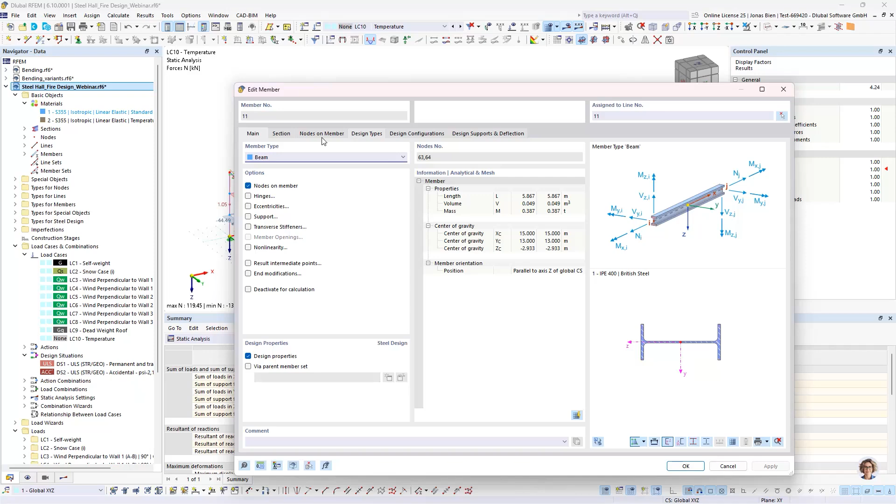So let's go back to the program again. I don't want to go into a detailed explanation of the construction stages. There are some additional webinars that you could look into if you're interested, but I just want to show you the procedure of how we can modify the buckling length. So in this model, there are some buckling lengths applied for those columns, for example, and we want to change them for the fire design case.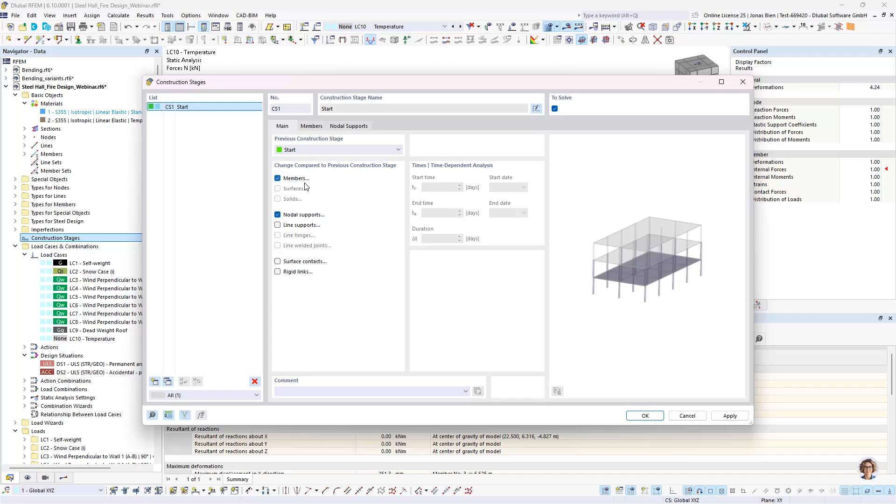So I activated the construction stages add-on, and I create a new construction stage where I want to activate basically all my objects that are relevant for my analysis. So all the members and nodal supports. I don't have any line supports or surface contacts or rigid links. And then under the member tab, I can not only activate or deactivate members here, but I can also modify them. And for example, I could now say, okay, this column here,

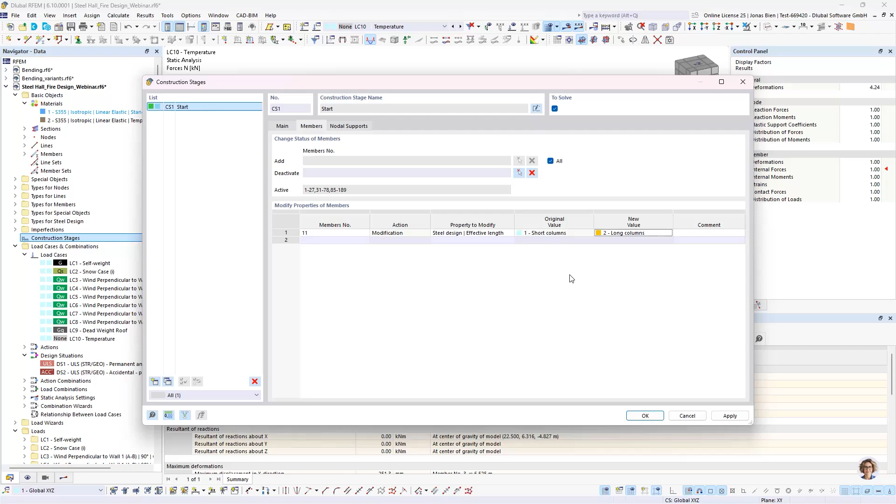for this column, I want to define some steel design configuration, for example, the effective length settings. And I could now override my original assignment of buckling length with a new one. Let's just take for demonstration purposes the type 2 I have already defined. But it could be every effective length type that I have maybe modified from the original version. Okay, I apply this with OK, and the thing I then need to do

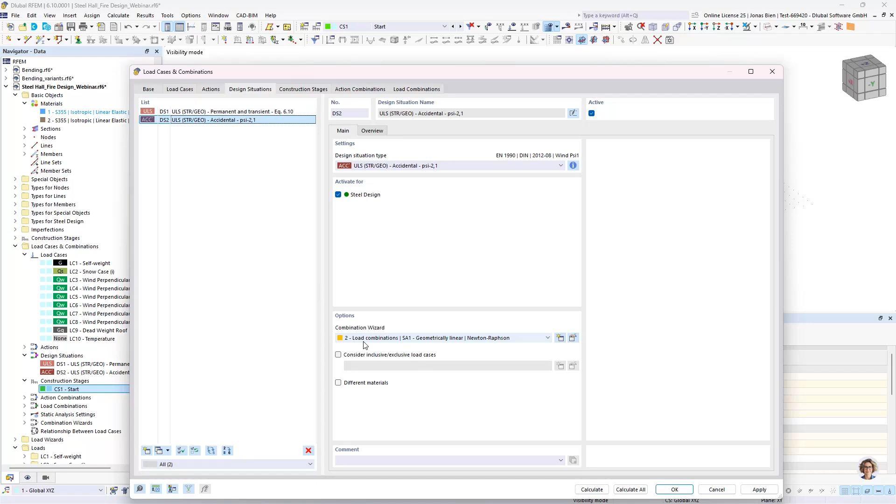to assign this construction stage to my design situation 2 is that I need to apply all the load cases to this construction stage. The easiest way to assign the construction stage to all load cases that are generated in design situation 2 is if I modify the combination wizard. So let's just copy the first one actually.

And now in this case, we want to consider an initial state. And this initial state is defined as our construction stage 1. I apply this with OK. And now let's see how those load cases look. And I can see for all the generated load cases, construction stage 1 is now considered as being active, and that also means that the buckling length modification would be active.

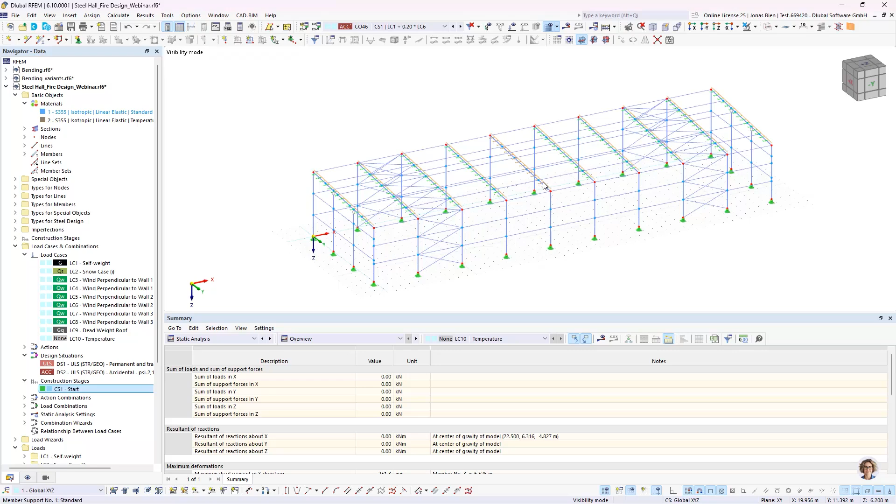A second scenario would be that you may want to change a boundary condition for the stability checks. For example, in this case, when I want to leverage the rotational restraint of these girders in the cold design case, I may wonder, if it comes from a trapezoidal sheeting, whether I should take this beneficial effect of the trapezoidal sheeting also into account in the fire design scenario. Because if I imagine that there's a fire in this steel hall, these trapezoidal sheetings heat up very fast because they are very, very thin, just 1 or 2 millimeters.

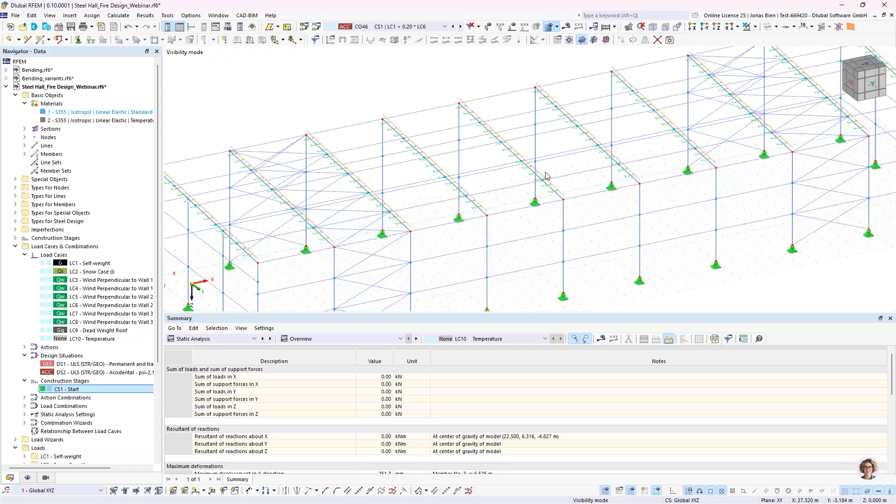And as we learned, the material properties degrade very fast, and I wouldn't have a lot of stiffness that helps me in my lateral torsional buckling design check in the fire design situation. So if I want to be on the conservative side and don't want to use this beneficial factor in the fire design situation, I could also deactivate these member supports in that case. And that can be done via structure modification.

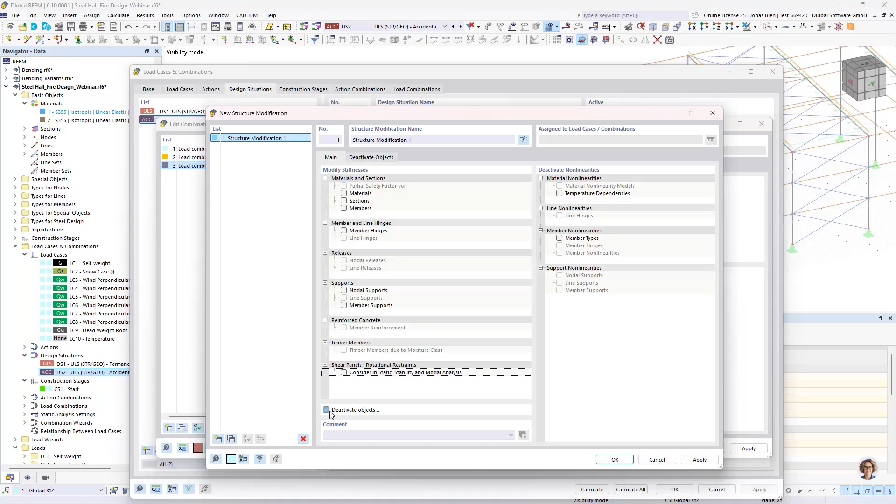I could assign the structure modification also to the combination wizard. That would be the most elegant way to have it active in all the load combinations that are then automatically generated. So I again open the combination wizard and now also in addition activate the structure modification. And in that structure modification, I want to deactivate specific objects. In that case, I want to deactivate the member support, and to tell the program which member supports I want to neglect, I need to create this object selection.

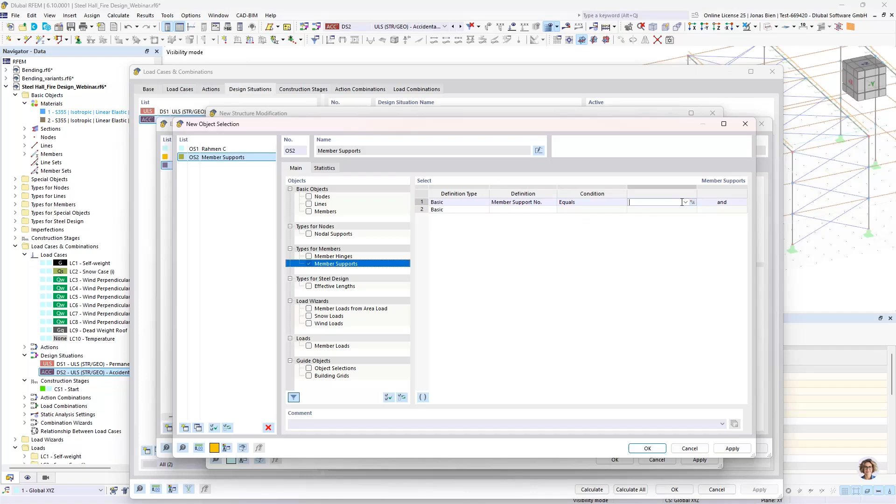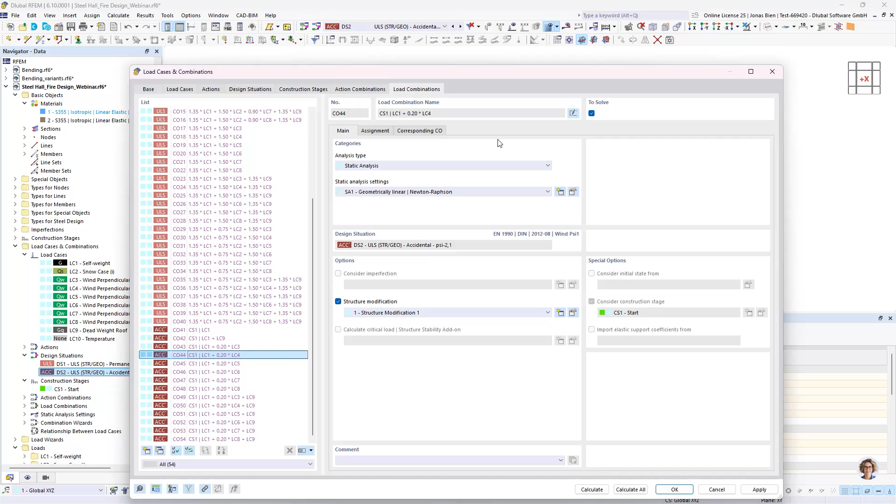And here I can, for example, select the member supports by their number. And I can also select the member supports I want to deactivate graphically. I need to make them visible first. Here we go. And in this case, I would also take into account the structure modification. And again, all the generated load cases and load combinations would have not only this construction stage where I modified the buckling length, but also the structure modification where I deactivated those rotational restraints here for the stability design of those girders. So I could do all of this.

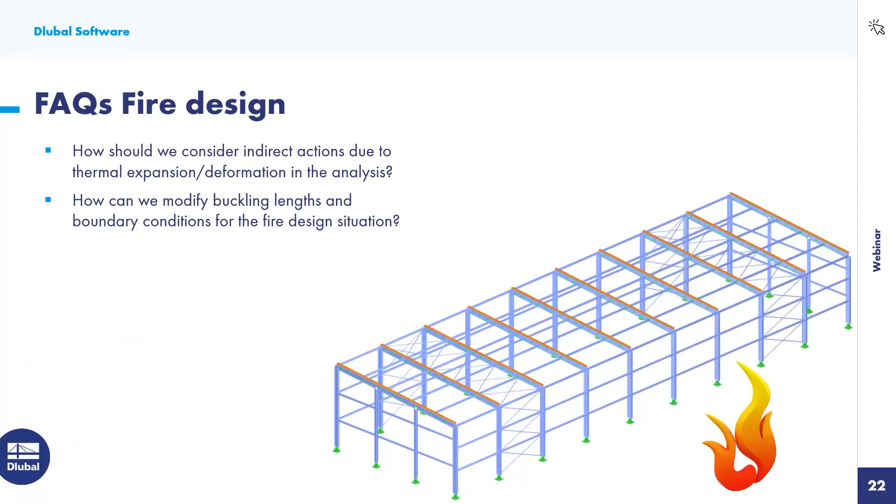I am actually not sure in which cases I would do so, because the Eurocode also has a paragraph on how to take the boundary conditions into account in the fire design situation. It says that the kinematic boundary conditions at supports and ends of members applicable at room temperature may be assumed to remain unchanged throughout the fire exposure. So if you want to change something to be on the conservative side, you know how to do that. I have shown you now, and it's a bit of engineering judgment if you want to modify those in the event of a fire.

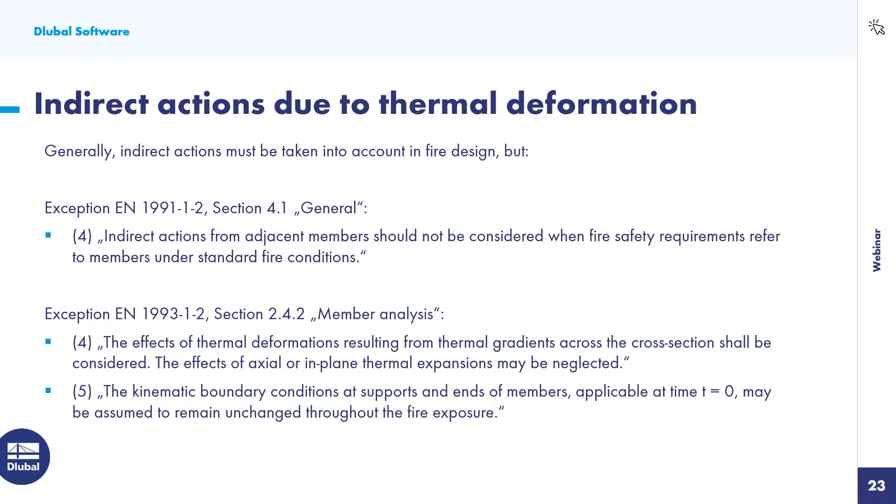Okay, the third question considers the verification of steel joints. Of course, when thinking about a complete steel structure, we should not forget that we also have to verify the joints besides the members. In RFEM 6, we have a dedicated add-on called Steel Joints for the verification of joints. But unfortunately, the design under fire conditions is not considered therein, at least not yet.

But experience from real fire events shows that joints are often not problematic. This is mainly due to the local mass concentration caused by welded-in sheets or stiffeners and bolts in that area. The increased mass means that the joint usually heats up much less than the connected members. We also have significant shadowing because of these additional plates, which also affects the heating process. As a consequence, Eurocode 3 Part 1-2 provides very simple rules for the verification of joints that you can leverage under elevated temperatures. And I think this is sufficient in many cases.

Under section 4.2.1, it says that the verification of joints can be considered settled if the fire protection system used for the joint is equivalent or better than the fire protection system of the joint members. The second condition is that the utilization of the joint should be lower than the utilization of all the joint members under normal temperature. So in the best case scenario, we wouldn't even need to do a hot design for our joint.

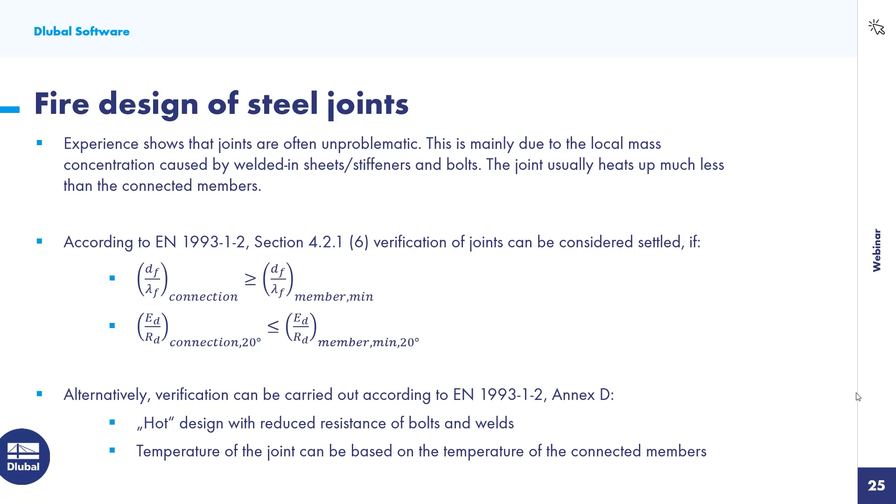The last question I want to tackle is how can I calculate the critical member temperature? This is also raised quite often. As I explained initially, the simplified member verification can be done resistance-based or temperature-based. For now, we have only implemented the resistance-based approach since it is generally more economic and has a wider range of application. However, we are currently working on the implementation of this critical temperature calculation as well, as many customers are requesting this feature for their purposes. So I hope I can give you an update on this very, very soon.